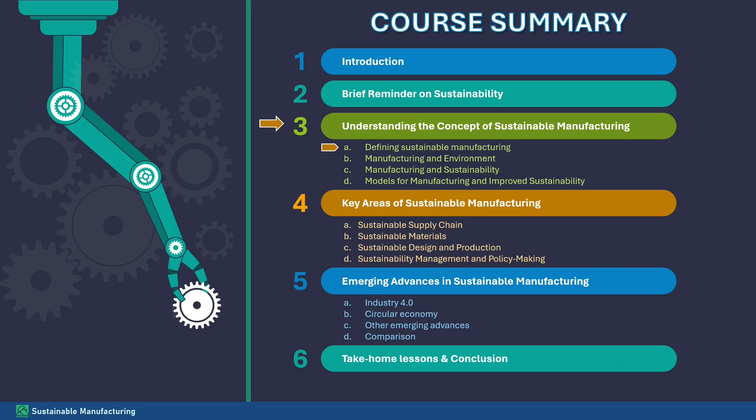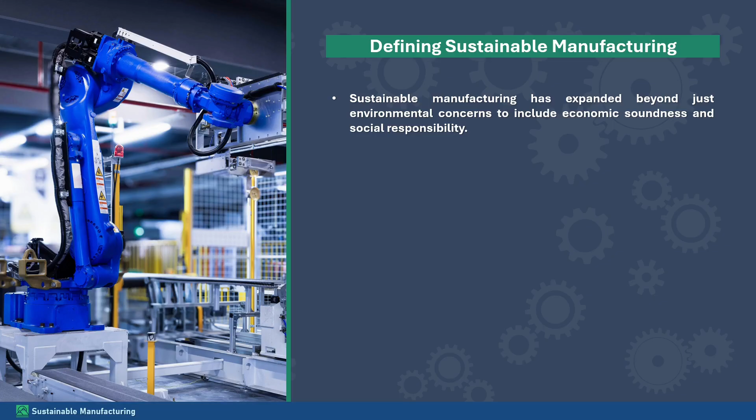Over the past couple of decades, the sustainable manufacturing concept has been broadened beyond a simple environmental scope. According to the US Environmental Protection Agency, sustainable manufacturing is understood as the creation of manufactured products through economically sound processes that minimize negative environmental impacts while conserving energy and natural resources. In addition, sustainable manufacturing is also highlighted to be promoting employee, community, and product safety.

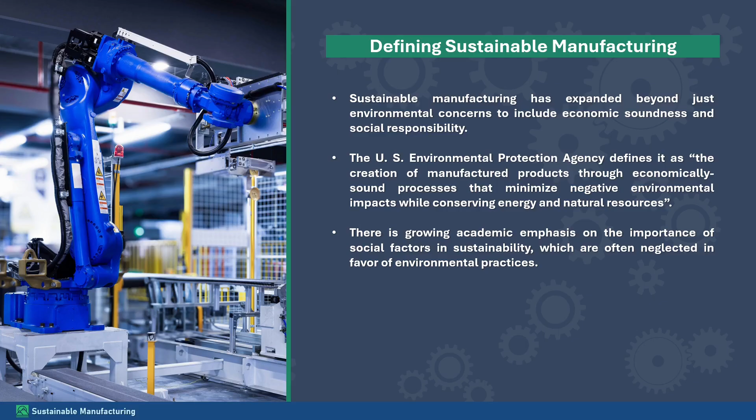The urgency for the social and economic extension to the basic ideas of sustainability and development is further highlighted in academia. It is often argued that social motivations are less dominant and are often overlooked in industry in favor of apparent green practices and aspirations.

The importance of adopting sustainable manufacturing measures and strategies by companies are numerous and are becoming increasingly recognized. For instance, climate change is increasingly seen as caused by anthropogenic activities and potentially having very serious consequences, while resources like energy, materials, and water are now seen as subject to scarcities and, in many cases, non-renewability that can affect operations.

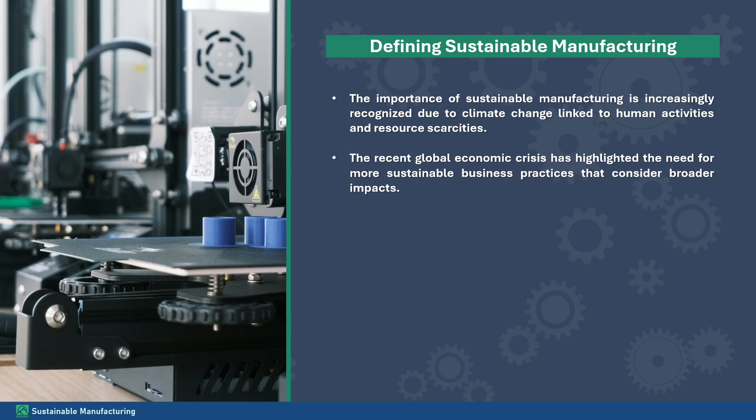Also, the global economic crisis of the last several years has raised questions about the viability and ultimately sustainability of existing business practices that aim for economic growth but pay little attention to mitigating the negative impacts beyond the company.

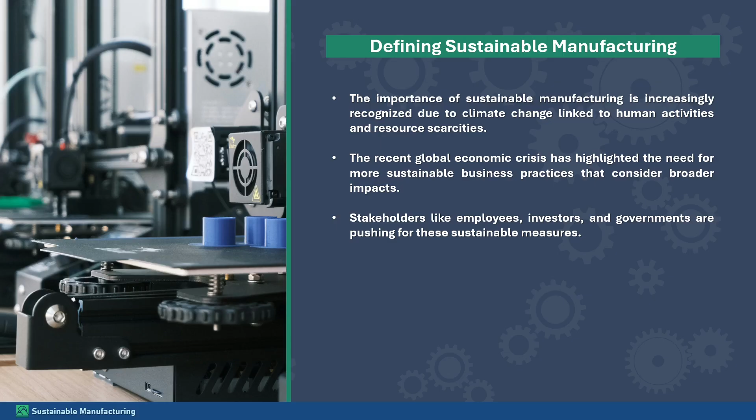As a consequence, pressures for sustainable manufacturing have become increasingly put forward by many stakeholders: employees, investors, suppliers, customers, competitors, communities, governments, and regulatory bodies.

In its extensive form, sustainability has become the benchmarking standard for business management, which shapes the firm's external reputation for customers and investors and affects the decision making at each level of the organization.

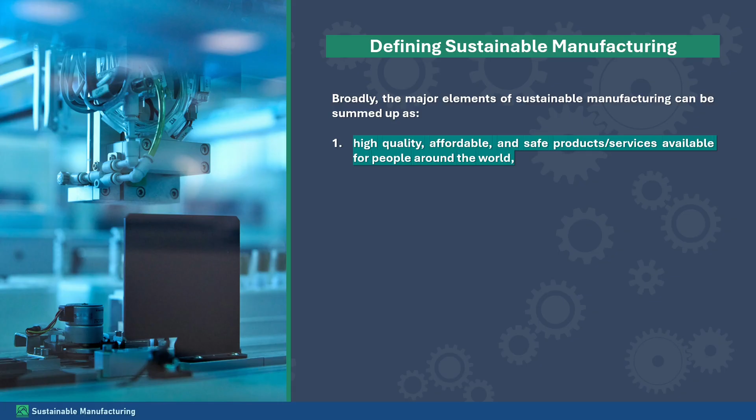Broadly, the major elements of sustainable manufacturing can be summed up as: 1. High quality, affordable, and safe products or services available for people around the world. 2. Profitable industry growth to create jobs and economic development. 3. Conservation of the environment, energy, and natural resources. And 4. Continuous improvement in safety and soundness in all factory floors along the value chain.

Given this, sustainable manufacturing implies an integrated system of business production operations comprised of sourcing, design, and production, material use, and business management that is aimed at minimizing harmful environmental effects, promoting quality and economic growth in a circular manner, and maintaining health and safety for humans involved in the process.

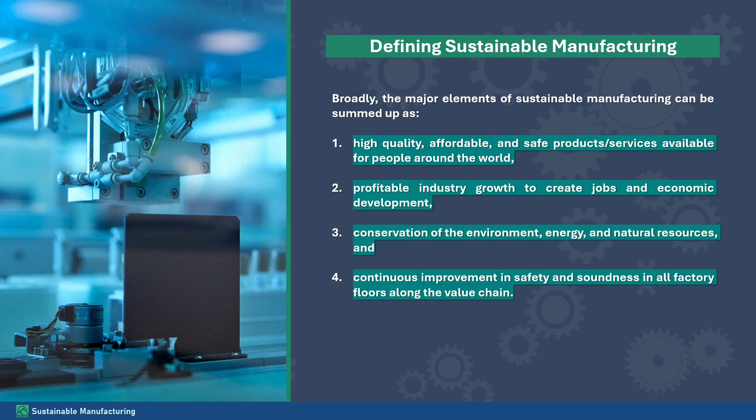Sustainable manufacturing not only deals with products, but also with the manufacturing process. Since management remains focused on the economic aspect of sustainability because of profit as the main objective of business, the environmental aspect needs focus in the context of barriers.

With the focus on environmental sustainability, it is necessary to know the metrics of environmentally sustainable manufacturing, because structured and focused measurement of performance of a process improves the performance of organizations.

The Global Reporting Initiative guidelines suggest a set of 34 indicators for disclosure in annual sustainability reporting. Many researchers proposed either new metrics or considered a set of environmental indicators in measuring sustainability of manufacturing companies.

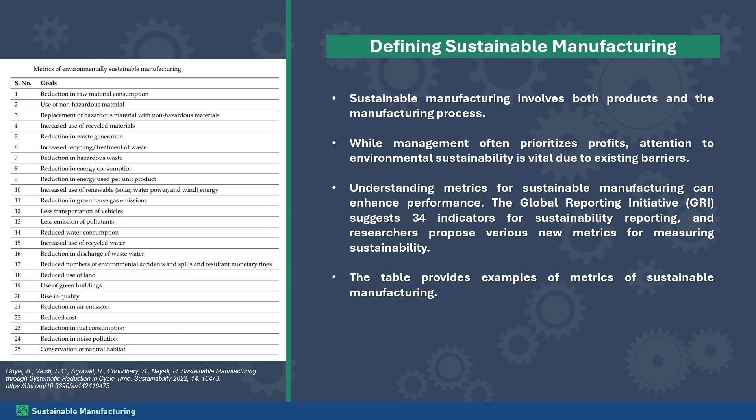The table on the slide provides examples of metrics of sustainable manufacturing. We have, for example, reduction in raw material consumption, use of non-hazardous material, replacement of hazardous material with non-hazardous materials, increased use of recycled materials, reduction in waste generation, increased recycling and treatment of waste, and reduction in hazardous waste.

Also reduction in energy consumption, reduction in energy use per unit product, increased use of renewable energies such as solar, water power, and wind, reduction in greenhouse gas emissions, less transportation of vehicles and less emission of pollutants, and reduced water consumption.

And increased use of recycled water, reduction in discharge of wastewater, reduced number of environmental accidents, reduced use of land, and use of green buildings, rise in quality, reduction in air emissions, reduced cost, reduction in fuel consumption and noise pollution, and conservation of natural habitats.